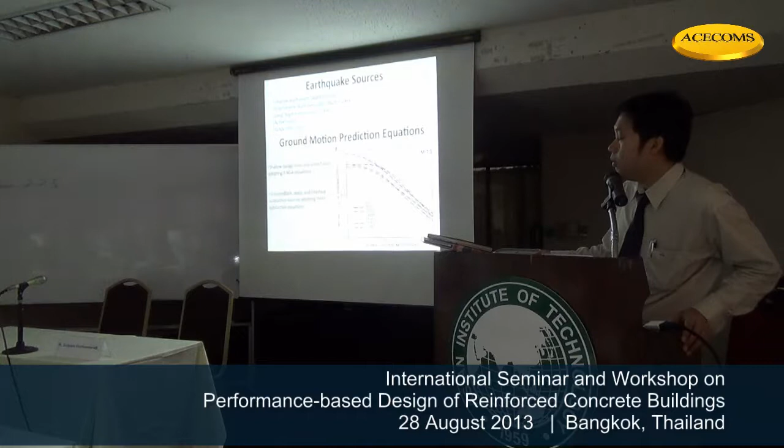For the earthquake source, I'm going to separate into shallow, intermediate, and deep earthquakes. Why? Because if the earthquake is very shallow, less than 50 kilometers depth, you would feel it very strongly. But if it's deeper than that, the effect on the structure would be less. That's why we have to separate the activity rate for these two. And then we use different ground motion prediction equations, because from studying recorded ground motions, we found that the ground motion for deep and shallow earthquakes is quite different.

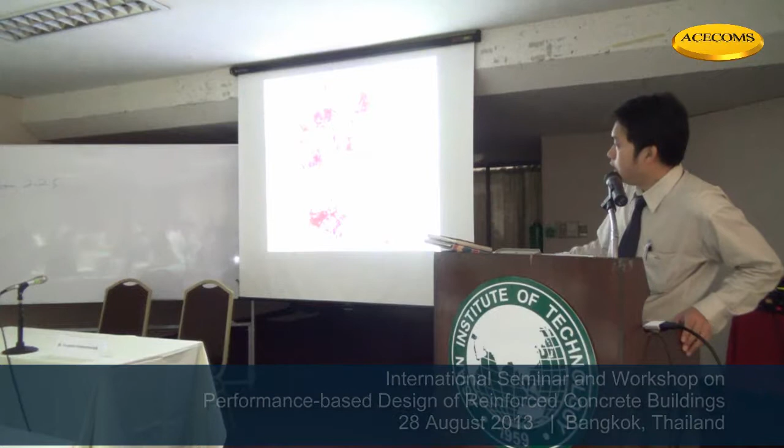And this is the seismicity map. This is Manila, and the red dots show the earthquakes that happened all around Manila, and the size of the circle shows the magnitude of the earthquake. So the activity rate for the last 100 years is much concentrated here and here.

And this is the big active structure, the Manila Trench. This is part of the subduction zone. Here also another one is the Luzon Trough. And this is another big active fault here that they call the Philippine active fault zone. And the Luzon earthquake happened around here in 1990.

And then what we try to do is we try to understand the characteristic of the shallow earthquake in the Philippines. Here we found that the average depth is 25 kilometers because the crust in the Philippines is quite thick. So the earthquake would happen a little bit deeper than what we see in Thailand, Myanmar and Vietnam. In Thailand, Vietnam and Myanmar it's around 10, or sometimes you can see it at the surface, but here it's quite deeper, around 25.

So it's good that it's a little bit deeper, so the energy that propagates to the surface of the ground could be reduced. And then we try to calculate the activity rate here, and this one we're going to use in the model. This shows you where exactly earthquakes happen more often than elsewhere. If you're going to build your structure on this island, then you have to consider that there are a lot of earthquakes here. So you have to design your structure for earthquakes happening more frequently than if you design a structure somewhere around here, because the activity rate of the earthquake is quite different. And this is Metro Manila.

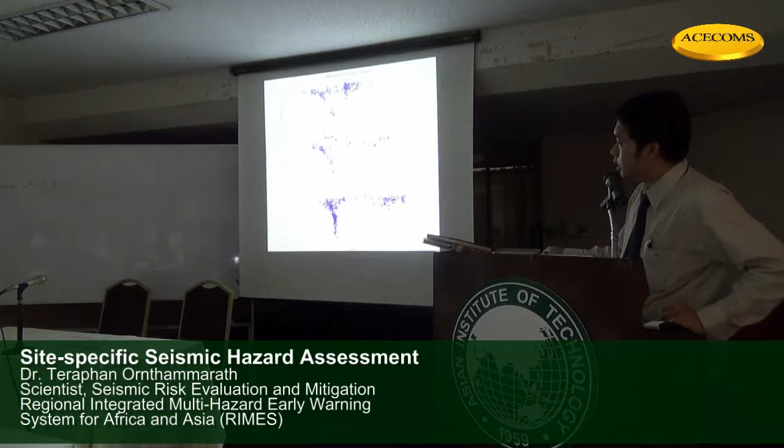And for latitude 13 to 14, you will see here another subduction zone. But these three are quite different in the sense that in this one the dip drops faster. The dip is quite different than the one in the north. So it has implications for our calculation, because for the subduction zone, this is an example of the Chilean type, where the two plates collide with each other, forming a subduction zone.

And because the two plates come toward each other, there will be compression. Here you could expect a big earthquake like magnitude 8 or above. But what we see here is not compression. It has been pulled down. So it's not compression, it's tension. So from the statistics and from our understanding, we would expect less big earthquakes from here. It could be something like 7.5, but it should not create a great earthquake like 8.5 or 9.

So understand this concept. You would know the seismic source near your structure, and then design accordingly. If not, you're going to overestimate your design value. So this one is closer to Manila, and we are quite lucky.

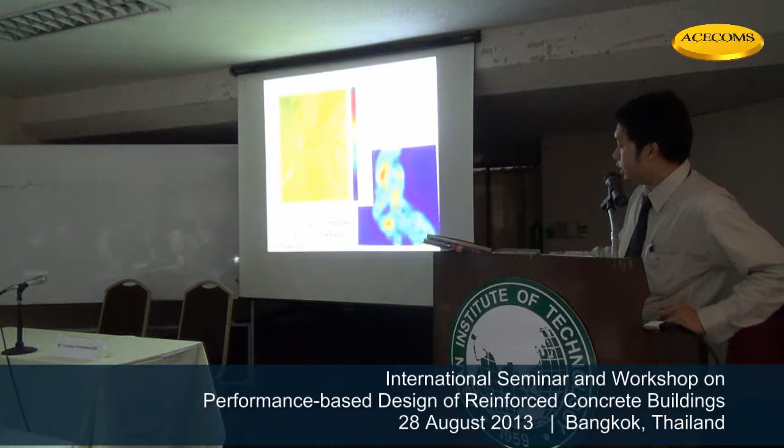And this is the seismic hazard map for Metro Manila for the 43-year return period. For the 43-year return period, it means what is the value that you should expect for the earthquake that could happen quite frequently, and it would be concentrated here and here, and it would be from here, and it fits well with what we observe in the frequent seismicity map here. So we observe that the frequent earthquakes that happened in the last 100 years fall around here. Sorry, that is quite zoomed in, so you would expect random earthquakes to happen from this zone of Manila. That's why this value becomes high on the eastern side.

And then when we go for the 475 year, we start to see that the earthquake effect from the West Valley Fault starts to appear. It's because we know that it's there, and from the paleoseismological study, the scientists, the geologists went to the field, they dug the trench, saw how fast it happened, and then this is going to have a result in our estimation. So it means that if you're going to design a building for 500 years, some consideration should be given to the Valley Fault. It doesn't mean that it's going to be magnitude 7. It could be something like 6.5 or 6, and then it happens very near. Then you have to consider that your structure should be able to withstand that.

And then for this one, for 2,475 years, now the peak ground acceleration becomes stronger just near the fault, because like I said previously, you would expect the largest peak ground acceleration near the fault, and then it starts to drop down further. So for the one that is located close to the fault, you should design your structure better than the one near the shoreline or Manila Bay.

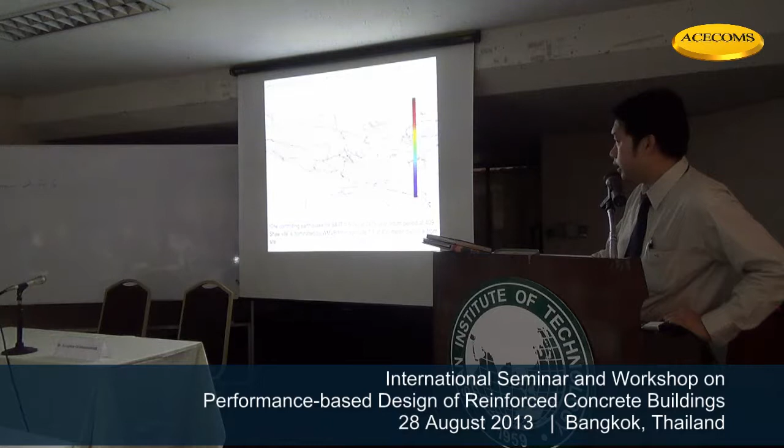And then we can determine also, if your structure is really long period, like 5 seconds. 5 seconds would be a very tall structure, like a 50-story building. So what is the earthquake that you should design for, where would the effect be from? It's still the active fault near the site, because a magnitude 7 would produce long-period ground motion, and we should expect the same source also, like 7.3 at 400 meters distance.

And this is the result of the de-aggregation for different spectral accelerations. This is from 0, 0.2, 0.5, 1, 2, 3, 5, 7.5, and 10. And the magnitude, the distance and the site-to-source azimuth are quite unique for this location: at the 2% probability of exceedance in 50 years, or the maximum credible earthquake, the Marikina active fault seems to be the one that controls the whole period range of engineering interest.

So when we select the strong ground motion for design of this structure, we're going to select according to this one, because this is the one that controls the seismic hazard at our site of interest. And when we know that it's quite close to our structure, then we have another problem, because, like I said, if you push the water in the water tube toward you, you will see the large impact. But if you're at the back, you will not see the large impact. That's what we call the pulse. Then you should design the structure differently.

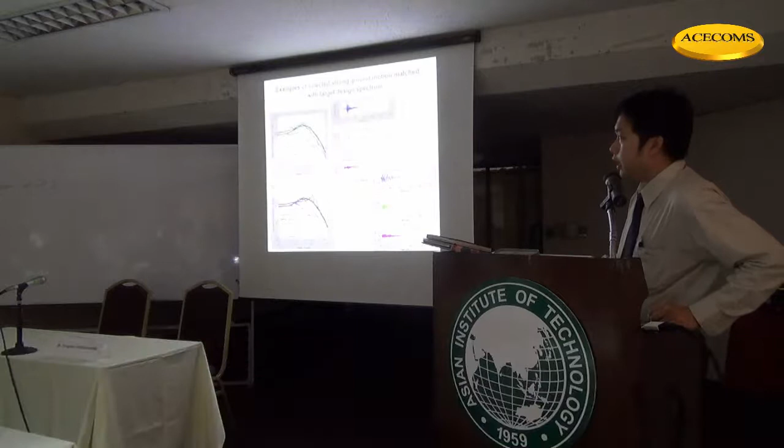And this is how we're going to select. This is the target spectrum, the black one. And what you're seeing here, the blue and the green, are ground motions that have been recorded in real time. After we select, like magnitude 7 from the same distance, we try to scale them to match the target spectrum. And from 7 records, here's the average, the red one. This here, I'm sorry, is the vertical ground motion. The vertical ground motion is most likely to be less than the horizontal one. And here are the ground motions that we selected and scaled for our case.

You will see that even from the same magnitude and distance that we tried to select, the seismic waves are different. This one contains more long-period ground motion, because you can see it going up and down, but this one is different. You see the peak and then it drops down quite fast. That's why I say that even the peak ground accelerations are different, like this one is 1G, this one is 0.5G, but later on we're going to make it fit to this one.

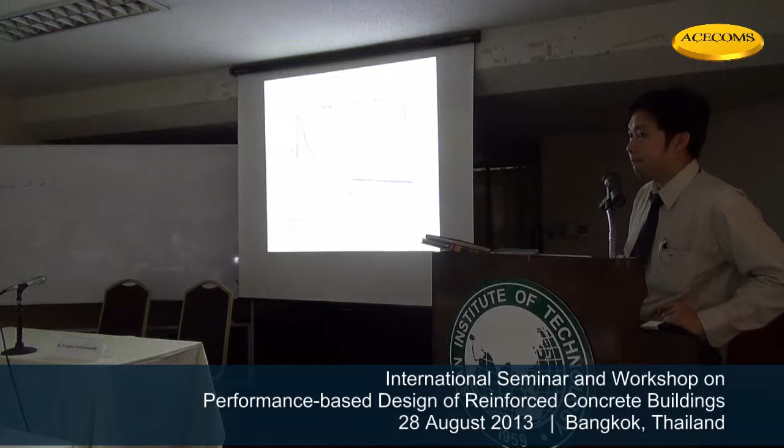And then the Tall Buildings Initiative, TBI, says that you also have to consider the second mode and the third mode of your structure. So the second mode here is 1.7 seconds, and here is the conditional mean spectrum for 1.7 seconds, and the third mode is 0.7, which is around here. So we're going to select the ground motions and scale them to match all these three, and then we check if our structure can perform better.

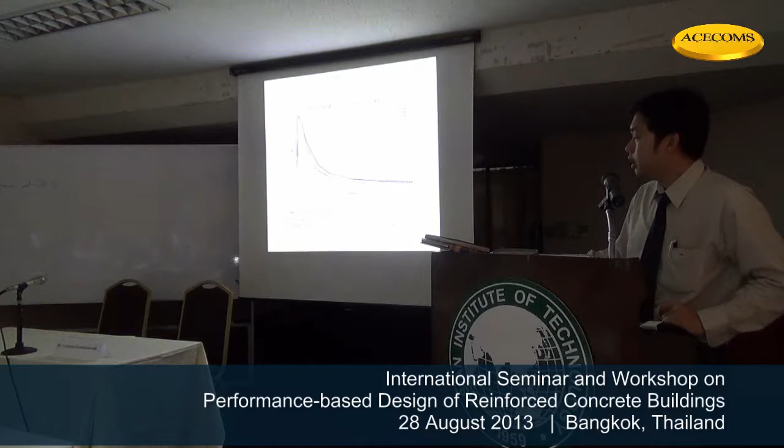Actually, it would give our structure less demand for the different scenarios that we're going to face for the earthquake. The uniform hazard spectrum for 2% would be too high. It would oscillate your structure at all periods at the same time, including long period motion.

And now, when we perform the site-specific seismic hazard assessment, the other thing that we should consider is the site where we're going to construct our building. Is it going to be rock? Is it going to be soil? It's going to have an effect on our ground motion. Like this is the acceleration time history recorded at two sites in California from the 1989 Loma Prieta earthquake. This one is recorded on the rock site, and this one is recorded on the soil, and both are from the same distance, approximately 22 kilometers.

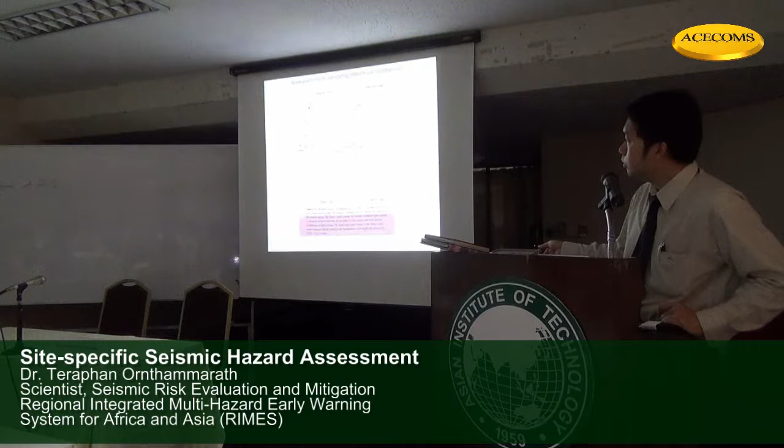And if you look here, it's not much different, right? The time histories look more or less the same. This is the east-west, this is the north-south, this is the vertical direction. Well, if you look at the response spectrum, it would be different. This one is from the rock, this one from the soil. So you will see that if your structure is situated on the soil site, you will see the amplification here at 1 or 2 seconds. Compared to here, at 1 to 2 seconds it is quite low.

This is what we call the site effect. Site effect because the soil is quite soft, so it would amplify. It's just like you put a jelly in your hand and then you shake it. The jelly would have larger amplification than your hand. Then you will see that here at the long period for the soil, you should expect something larger compared to the rock.

And also when the ground shaking becomes large, there would be nonlinear site amplification, and then the peak ground acceleration for the soil would be lower than the one for the rock, because the ground cannot amplify all the ground motion; it's going to have some limit.

The amplification would be lower here for the short period, but it will be larger in the long period. And the long period is the one with the tall, high-rise buildings that we face all around the world. Because we tend to build our structures near the river, this is the problem for every big city in the world, like Bangkok, Manila, and Los Angeles. You should expect something like this site amplification effect.

And this one for the spectral velocity, you will see more clearly. Spectral velocity here for the rock, and this is for the soil. It's quite different. Here for the soil, you will see that it has a high spectrum at the long period, quite clear.

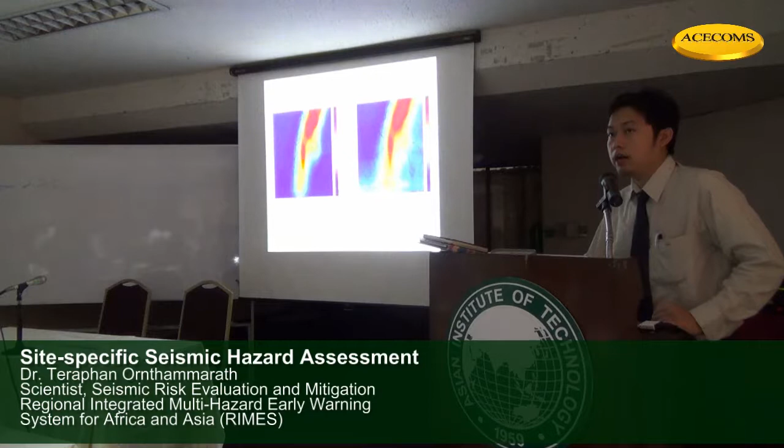And the one that I showed you previously, the map of Metro Manila, is computed based on the bedrock. But if I want to consider different soil types, like in NEHRP, they set different soil classifications, like soil type B, C, D. They separate them based on the shear wave velocity. If it's very soft, it would be SD. And if it's SC, it would be a little bit stiffer.

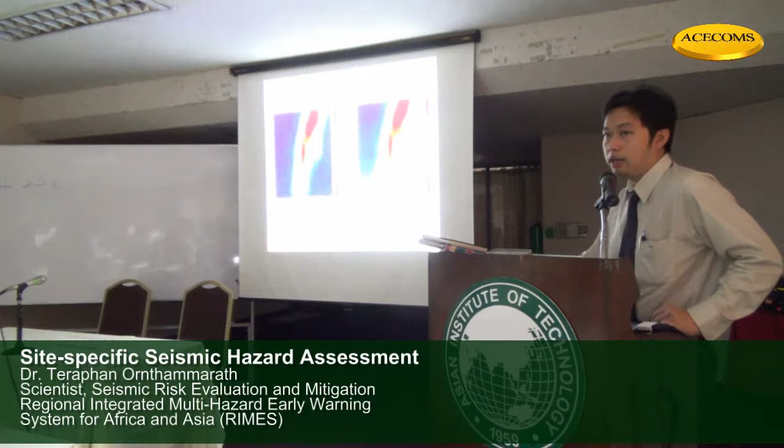But it doesn't mean that all would be in this value, because this is just a rough estimation. We don't know, here, is it soil type SB, SC, SD? I don't know. Then we need data from the site, like the borehole profile, or we have to do shear wave velocity measurements at the site. There are many different methods that we can use, like MASW, the SPT, or the recent one, the microtremor array analysis.

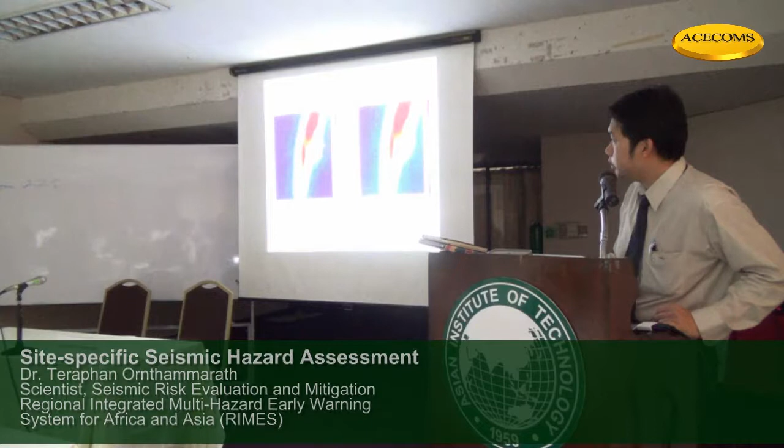And this one is the seismic hazard for the spectrum at 1 second for different soil conditions. This one is for soil SC, this one for soil SD, and you will see that the chart is also different. And you would not expect that it's going to be high forever. There is a theory that the soil would not amplify linearly, because when the ground shaking is quite strong, there would be a non-linear soil amplification effect. Then the ground motion would be a little bit lower.

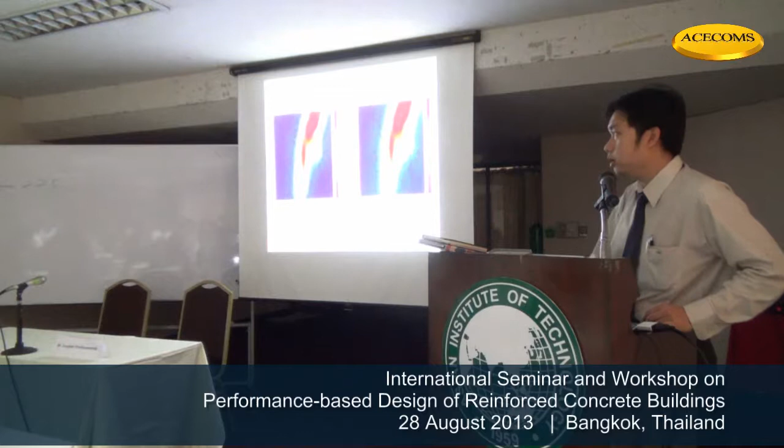And this is the method that I mentioned, the microtremor array analysis. This one is quite cheap. You do not have to perform a borehole study. Mostly the borehole would cost you quite a lot, and it could not go that deep. They say that VS30 means the shear wave velocity down to 30 meters. But why did they set it as 30 meters? Because that is the farthest that the borehole can be drilled within 1 day. That's where the concept of VS30 comes from.

And that one is quite easy also. But imagine your structure is a very high-rise building, a 40-story structure. If you just know the velocity profile for 30 meters, is it going to explain anything? No. So for site-specific analysis, your site is very important. You want to know more about the condition underground, and how to do that less expensively. You're not going to do a borehole profile for 1 kilometer, right?

This is the method that we have currently been using in Bangkok also. It could go down to 1 kilometer to measure the shear wave velocity in the ground. So we would know more about the ground condition that we're facing, and then we perform the ground response analysis, because we know more about what is really going to happen, and then we can model it better.

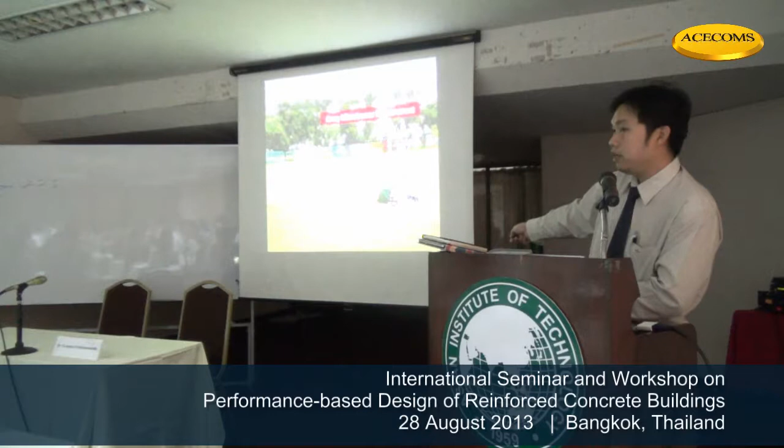The idea: they put the instrument here, and then put another 3 all around, and measure the noise at the same time. Then they start to separate them from each other and measure the noise, to better know the shear wave velocity underneath. This one is around 5 meters, so they can measure the shear wave velocity to around 5 meters.

This is the study they performed in central Bangkok, at Chulalongkorn. They start from here, with another 3 here, and then they separate from each other. The farther they go, the deeper the measurement they can make. From our analysis here, we can go down to 1 kilometer.

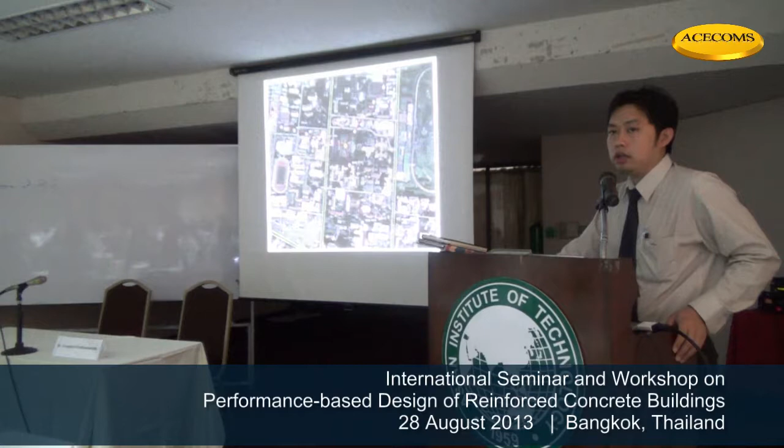And this one, like I said, it's going to measure the noise nearby, and then they're going to measure at the same time. When they separate from each other, they're going to go down further underneath the soil. Then we're going to better measure the shear wave velocity.

This study is going to be used when we have the basin effect, like Bangkok itself, and I think in many countries, in many cities also, because we tend to build our cities near the river, that is going to have the basin effect. And I think that might be all for me.

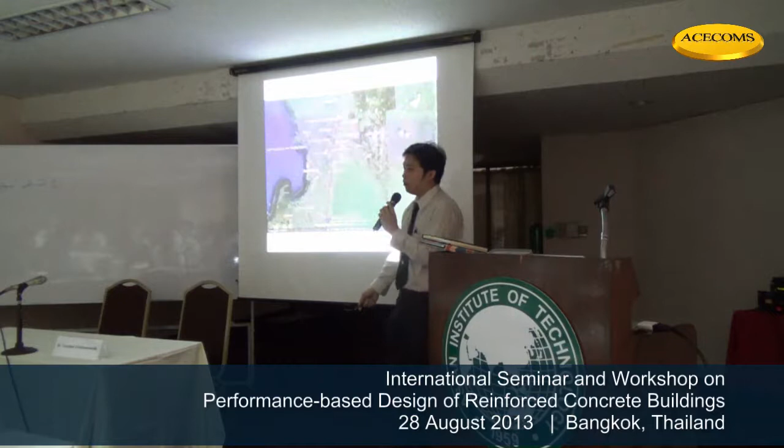If further study shows evidence that this zone would be a segment, this one is not going to be more than magnitude 7, and it would be more around here, then the value would be very low here, but not here. But based on the current data, we have to assume the whole thing is uniform, because we don't really have enough data, and also it's in the metro city. It's quite difficult to dig a trench to see where the active fault movement is. So it's quite challenging for this one.